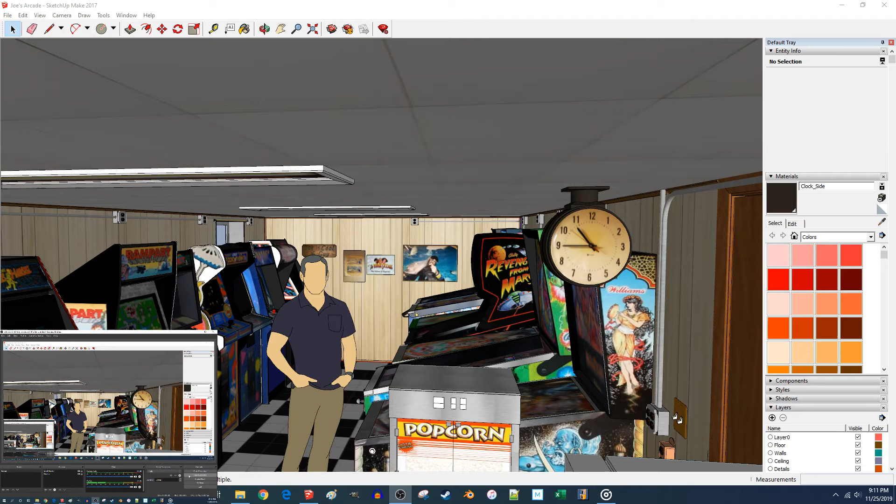This time around, as I sneak over to my Joe's Arcade files, we are going to be working on kind of the last bit of furniture that we're after, which is a water fountain that goes around here. Drinking fountain, water fountain, bubbler if you're one of the crazy folks.

Sorry, that was an unnecessary dig at Wisconsin while I'm stalling for time looking for what I'm after, which is just a picture of the water fountain. As a reference, there's kind of one. There's a good one, there's a little bit more of the area. So yeah, trying to do this water fountain.

Now I do have dimensions on that, I believe. It is 17 by 14 by 40 inches tall. And I'm going to say that 40 is probably to here. But I think I'm going to be able to get the base of this from the warehouse, the 3D warehouse.

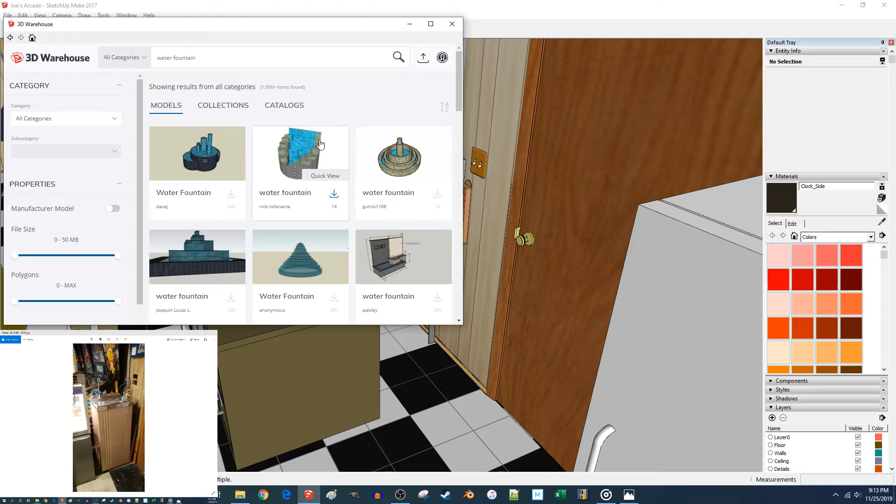Now I did kind of a cursory search. I didn't see anything that was like what I was after exactly, but I did, I believe, find some models that maybe I can mash together to kind of come up with what I'm after. So that's kind of like a classic public building type water fountain. So you're getting a lot of just like this sort of water fountain, which is not the sort of fountain that I'm after.

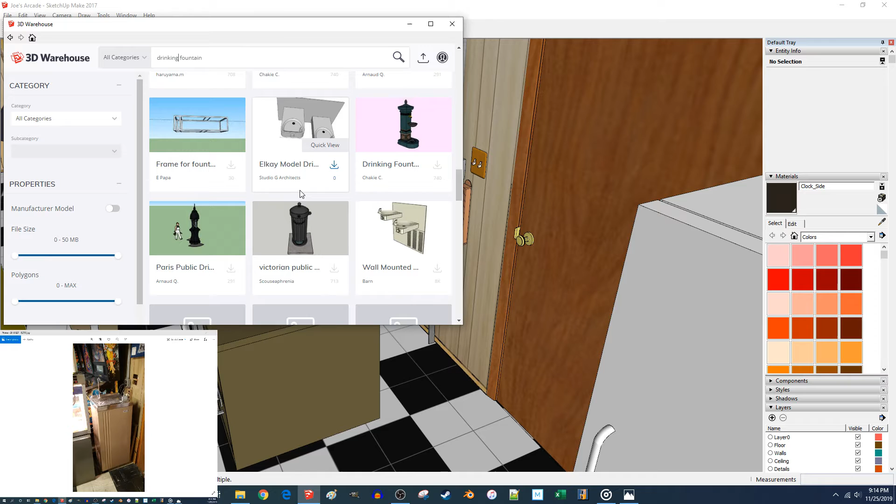I'm going to try drinking fountain. See what we come up with there. A lot of different models here. These are all closer to what I'm after. That's a pretty good model. I think this water bottle filler is something that I'm interested in, so I'm going to grab that.

Oh, I have to sign in. Alright, here we go, back on. I had to reset my password there because I couldn't remember it. Anyway, we were in the process of downloading this water bottle filler, which I want to check out the details real quick too. Yeah, okay, interesting. And of course, modeled by Courtney L. So we'll go ahead and download that and load it directly into the SketchUp model. There we go, looking all right.

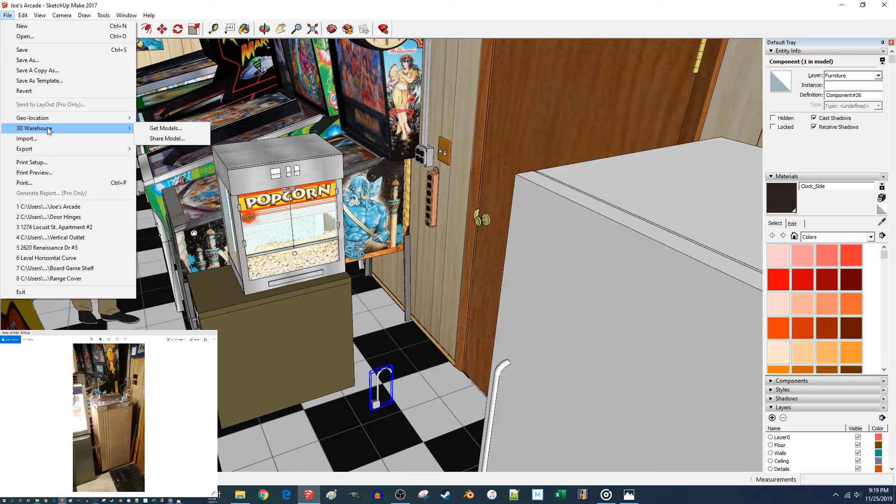And back to the warehouse. Gonna try to find a few more details of this item. Drinking fountain. These are almost not far off. That's almost pretty close as well. Not quite though.

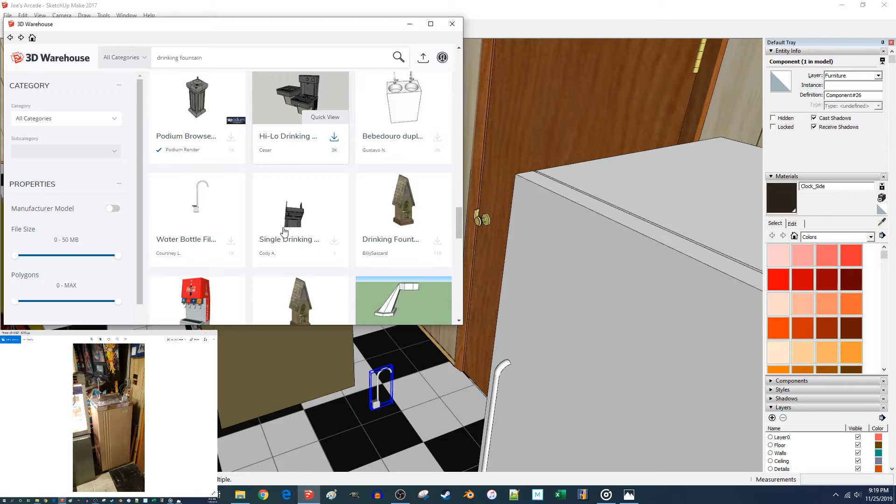Maybe the best that I can find, though we will see. So we keep scrolling down. That's not bad.

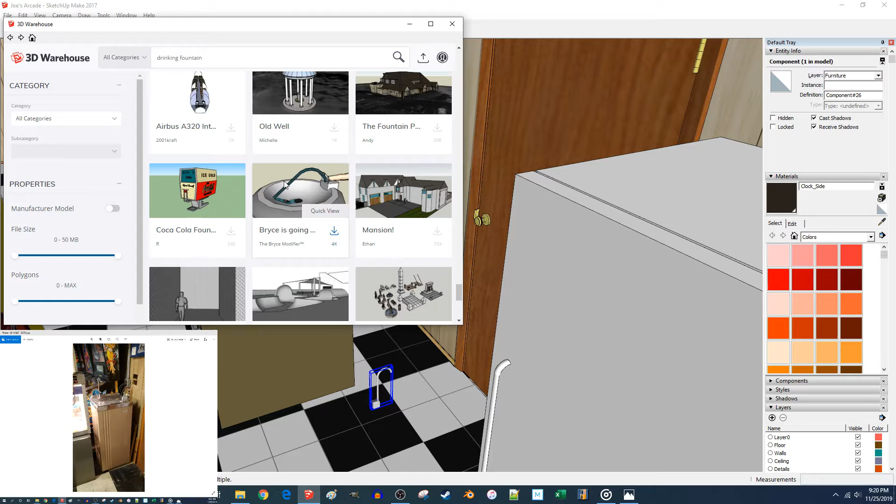Wendy's restaurant. That's pretty interesting, I guess. Wow, this has got a picture of a finger on it. Just curious what this says. Bryce is going to drown in the water fountain. That's horrible, poor Bryce, get out of that water fountain. Very strange. Huh.

All right, anyway, we're gonna move past this model here. Go back to our main drinking fountain model page. It's a strange tangent. I just hope Bryce gets out of that drinking fountain.

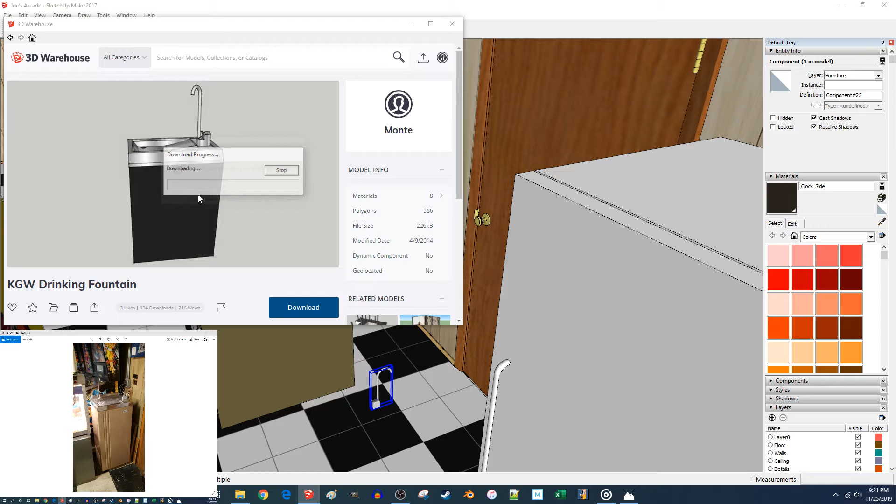And that's all we've got for those. So I think I'm gonna pick the best one available, which I would have to say was this one. It's not too far off, and we might use this as a base and make some modifications. Let's download that. And let's also make sure, yeah, I'm on the furniture layer.

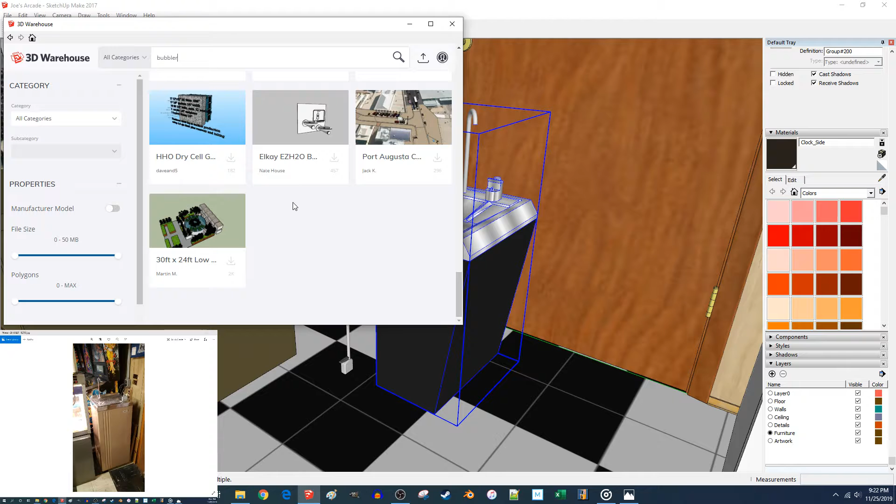Let's do one more quick search through the warehouse too, just to see what's out there. Wonder what will happen if I search bubbler. Get a lot of strange things here. Very few of them appear to be drinking fountains, so we won't use that. I'm going to take one more search through water fountain, but not very promising.

So what I'm looking for that I haven't seen on really any of these is this unusual method of activating it. It's not very standard anymore, but it's okay.

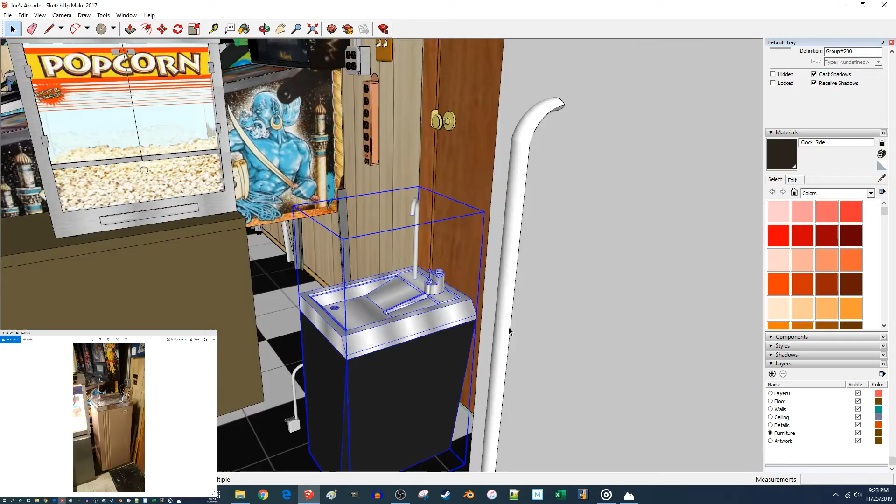We'll start with this one here, like I was kind of indicating. Make some adjustments to it and see where it goes. So I'll delete that.

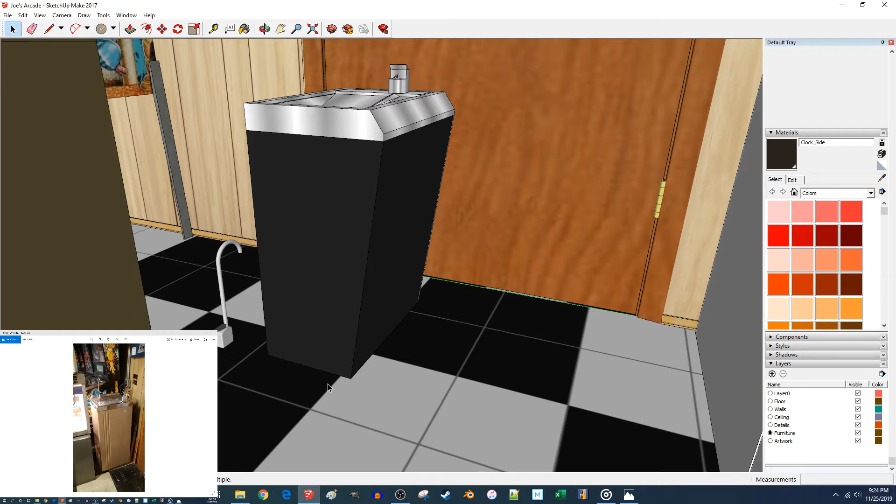And already I think it's going to be a good moment to start taking a look at the overall dimensions. I think we wanted this thing to be 14 by 17 by 40. So let's go 14.

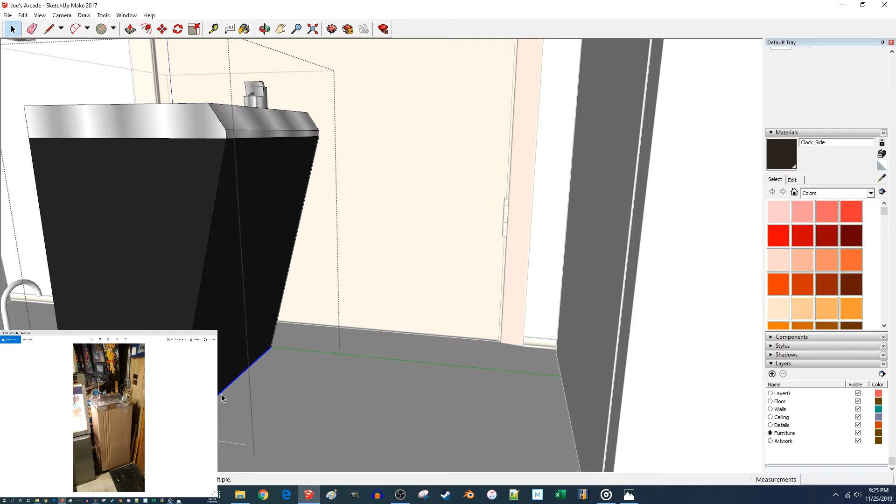And I'll grab kind of all this geometry here, and we'll pull this thing out, make it 14 inches wide. We'll grab that. Now we've got our width.

Should be 17 inches long. Pretty close to that already. But I'll grab all this stuff. We'll lengthen that to 17 inches.

Do a double check, measure twice, model once - 17 by 14, and 40 inches tall, which it is nowhere near. I'm going to just do that, because then I can grab this bottom face and just pull it to the floor.

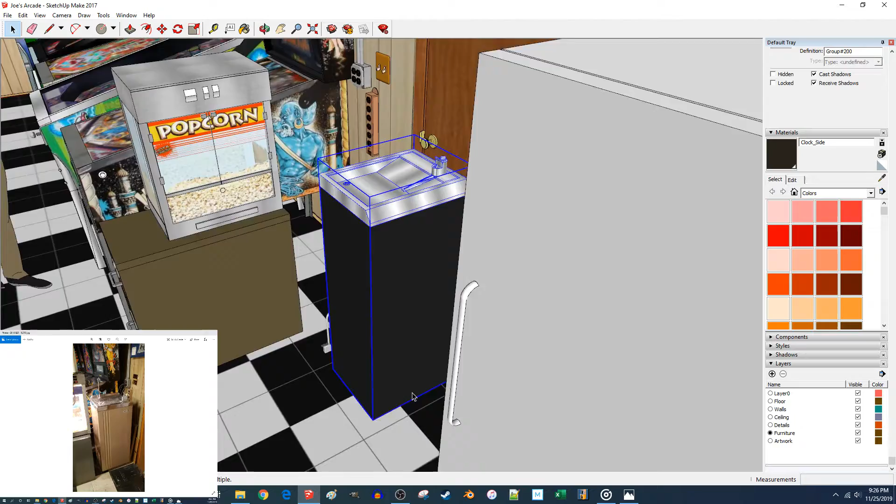Alright, I would say that's already looking a little bit more like it should. So another thing that I've noticed, and I don't know that I have a really great angle to show it, but this water fountain spigot should be rotated differently with respect to the lever.

So I'm going to turn this thing 90 degrees, and then the lever part down here should be rotated, yeah, 180 degrees.

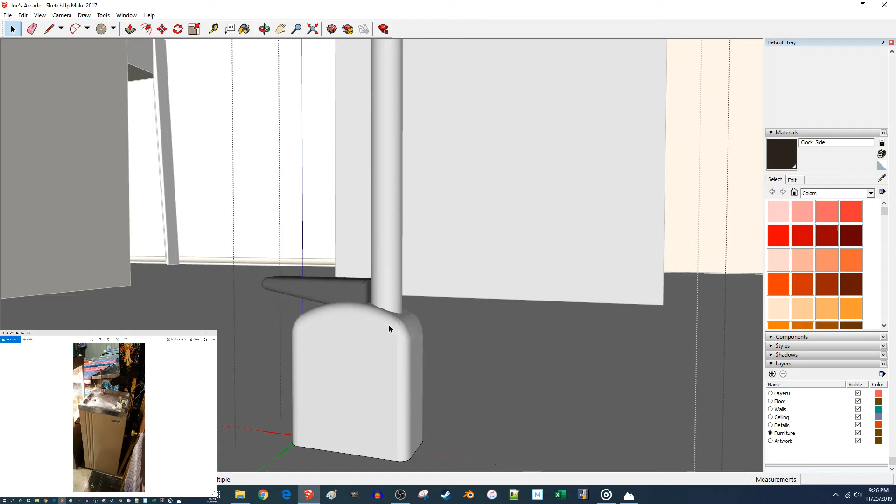Now, the other thing I'm noticing is that this is all one component. It's very well modeled, but it is going to be a little bit of a challenge to rotate this the way I want to.

I think what I'll do is I'll copy this part of it 10 inches away. What happens if I just try to yank that up? Yeah, it's not pretty, huh?

Okay, I want to see inside. Maybe there's a face I can grab a hold of. I'm going to get that off the floor so I can do that more easily, 2 inches up. Ah, yeah, here we go.

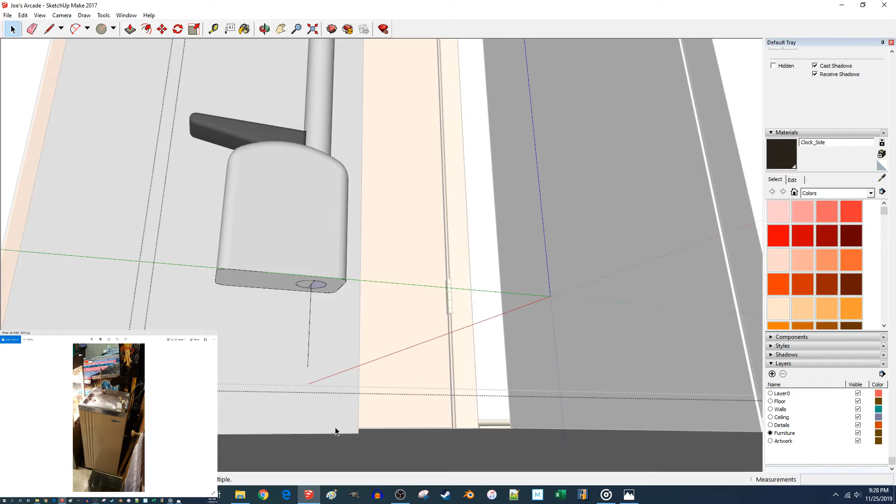I'm going to grab the midpoint of this and just draw a line down. That is where this thing should be centered. Now I'm going to select it. Oop, I'm losing a lot of stuff here, but I'm going to delete it.

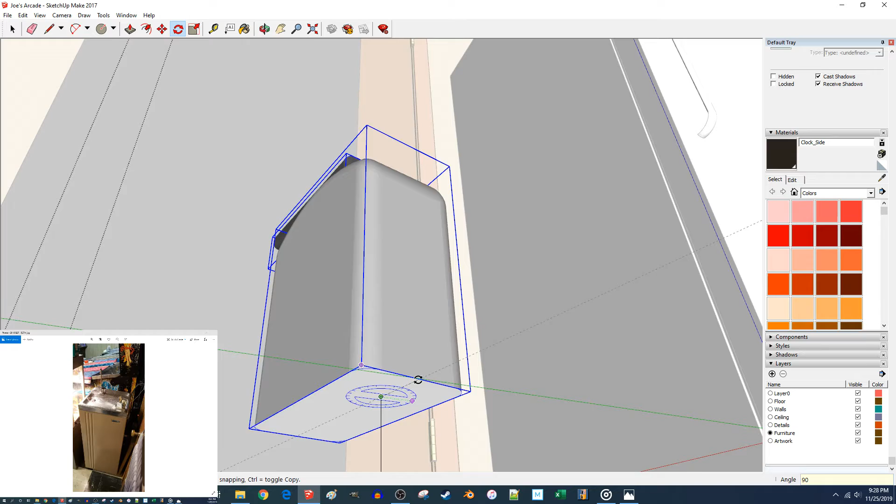And I'll group this piece, and I'll group that piece and this piece. And now I'll go ahead and rotate those 90 degrees. There's a little bit of some clashing stuff going on in the corners here. I'm not going to worry myself with that too much. It's a very minimal detail.

We'll move that back 10 inches. Now we're angled the right direction. And I would say this can get placed in here once that's ready. I'm going to make a few more modifications to it first, though.

Autosaves always remind you that you should save.

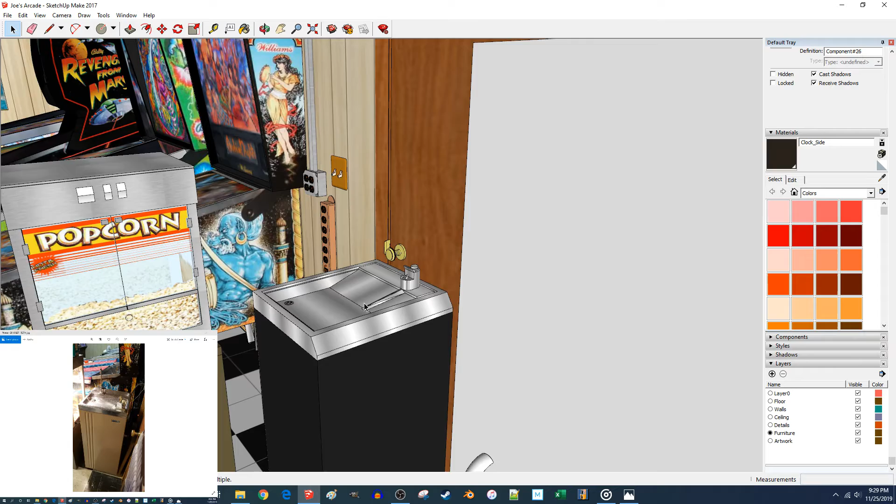So we have some of this same geometry in the model we're going for, but it's angled almost, which is interesting. And then above that angled portion, it's a little flatter.

Again, obviously I don't have real dimensions that I'm working off with on this, and I'm going to simplify it a little bit, keep these corners as opposed to doing radii. But I do want to get the general concept across.

There's also this edge here that's raised a little differently than it is in this model. So I'm going to start here, just draw some lines like that, and total eyeballing, I'm going to pull this up an inch.

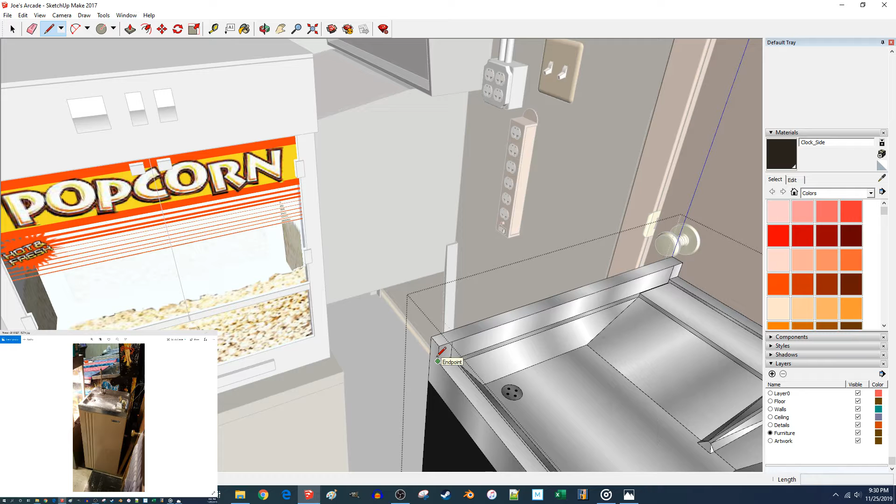And I'll make a connection there, delete that line, and make a connection here. That's going to enable me to grab these edges here, pull them back. Let's go an inch - an inch, make a 45-degree angle, which looks pretty good compared to the source material.

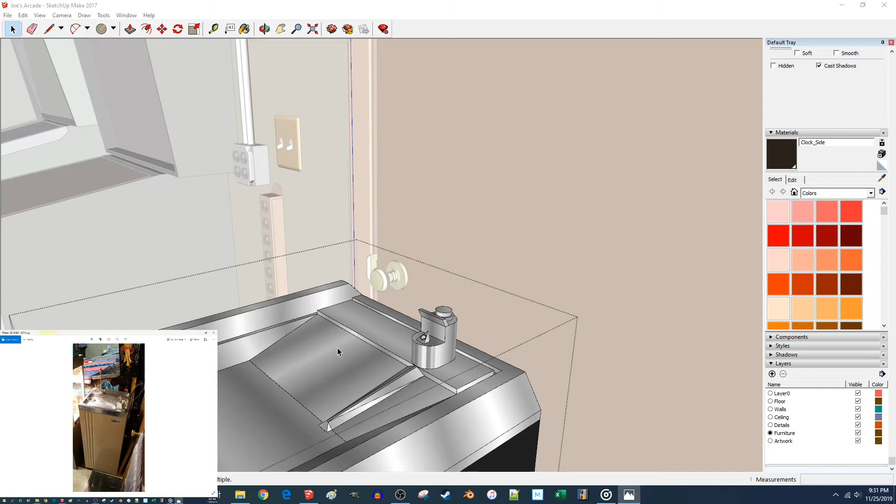Not bad at all. And I'm going to pull out the little shelf here, and that's going to be where the bottle filler sits. This elevation difference doesn't really seem to exist in the physical copy, so I'm going to kind of blow that away.

This isn't the most complicated model that I'm working with here, but it is really well cleanly done, which I always appreciate.

And almost, I'm going to see what happens. Nah, apparently I can't really move that face very much.

I guess more than anything, I'm kind of curious what happens if I lift these edges up and make this come to the same level, essentially getting rid of this vertical face there.

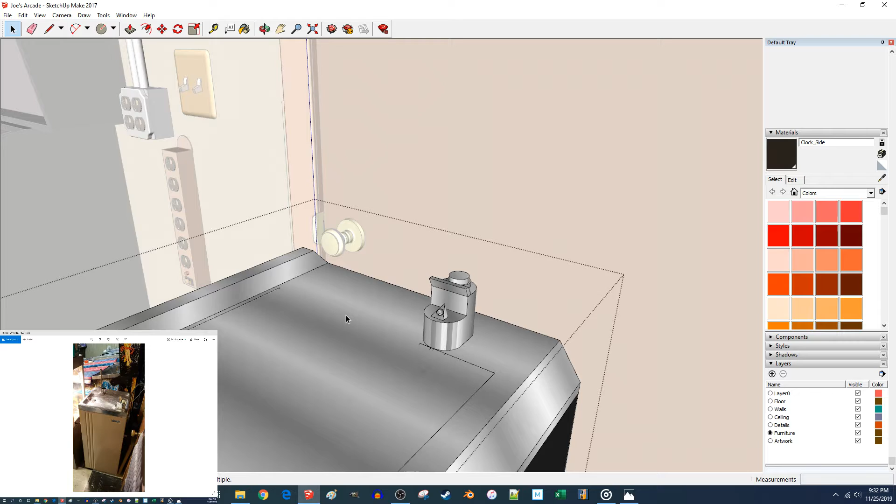It's not half bad. Don't have any extra lines, it doesn't look like, which is a risk, especially in other software like Blender - double lines are much more of a pain. Okay, I think that looks a little bit more like what I'm going for.

Now I'm going to grab this face here and the drain. Ooh, there's something more going on in the drain than I realized - the actual drain holes are modeled.

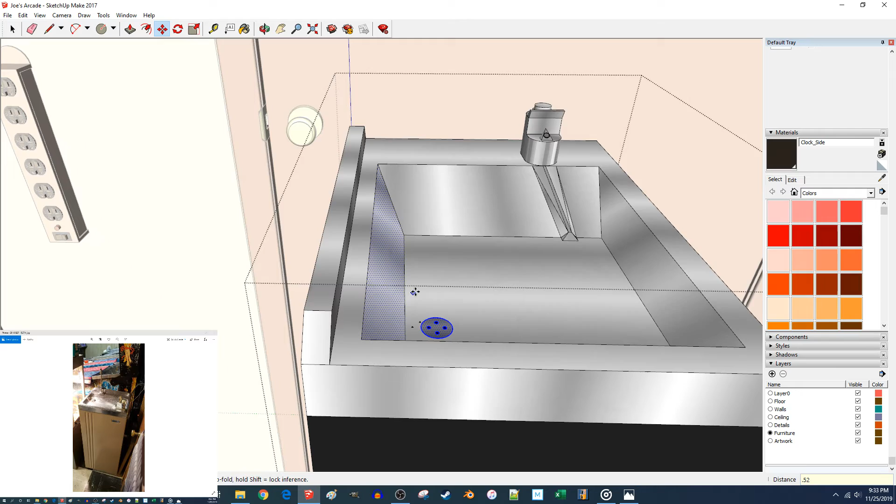Alright, we're going to now pull that out just a little bit, maybe 0.52 inches, and that's where this is going to sit. Looks like that wasn't quite enough to pull it out either.

Probably should have brought this over as a reference before, huh? But let's say I want it to be sitting about there.

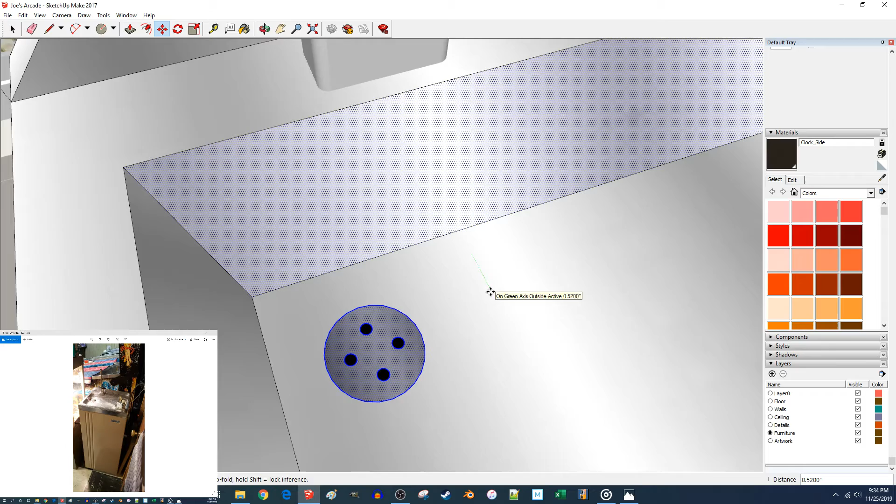I'm going to delete those, whatever they are - looks like some extraneous details. There we go, that looks all right.

That's about where that should be sitting. Even location-wise in this thing, it's not half bad, so I think I will keep it.

So the last couple things to deal with here are going to be some of this interior basin modeling.

I'm going to grab this and move it over, say, an inch, because it just looks a little closer. I'm going to move this over - well, before I do that, this should be a vertical face.

So I'll do that. Delete that, and now I'm going to move this over till I get close to the edge that I want, which I'll do - let's actually get like a semi-uniform edge going around this thing of 1/2 an inch.

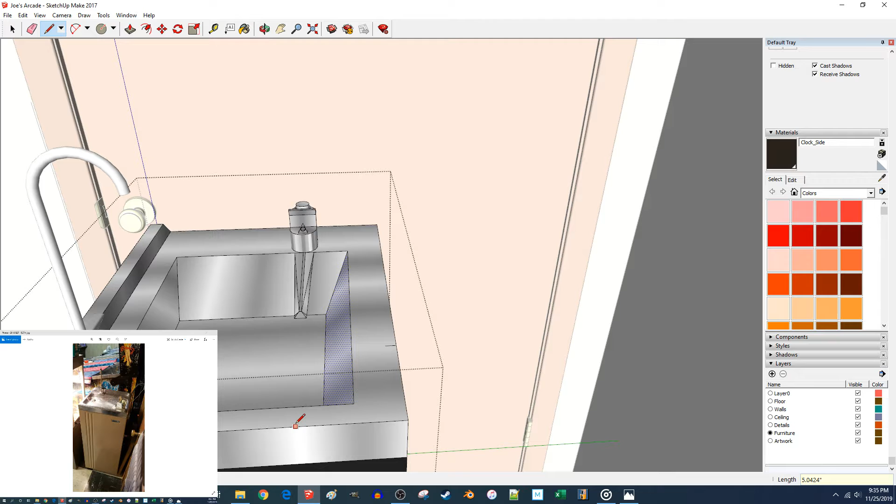Except for on that back side, which is about 3/4 of an inch. I'm okay with that - hopefully everybody else is as well.

But we'll move that, we will move this, and we'll hold off on that other side for just a second while I think of how to approach it.

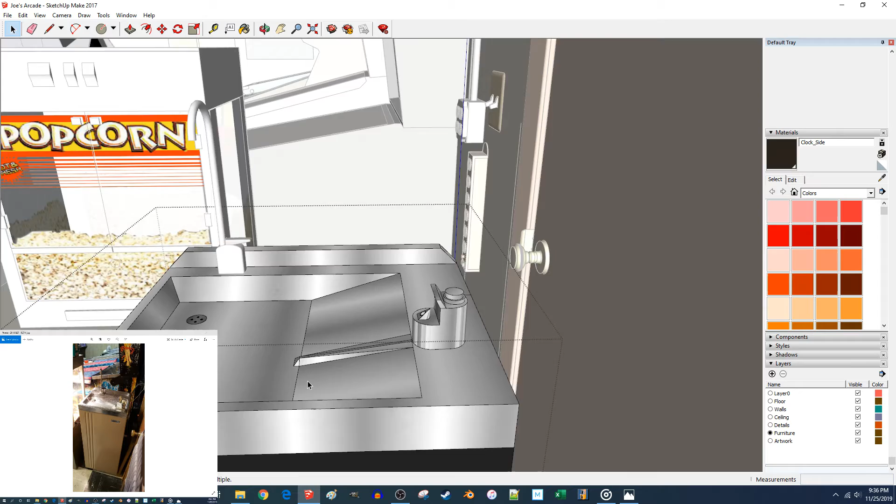Because this piece here, thank goodness, is its own component, so I don't actually have to worry too much. I'm going to just, for the moment, pull that thing back 5 inches.

And we'll take these elements here and move them back to our border. Now, some of this now is going to have to change.

This piece, I actually want to kind of extend out from here. And I might actually end up doing a lot of this from scratch now.

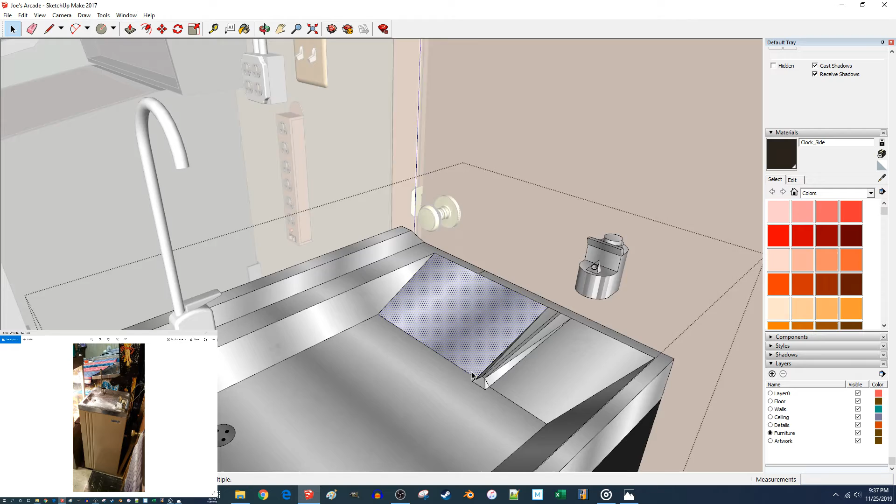Just want to think before I step too boldly and delete a whole bunch of stuff that I'm going to want to keep.

Keep these grooves going after they end. What to do?

I'm going to flip my attention back to this thing.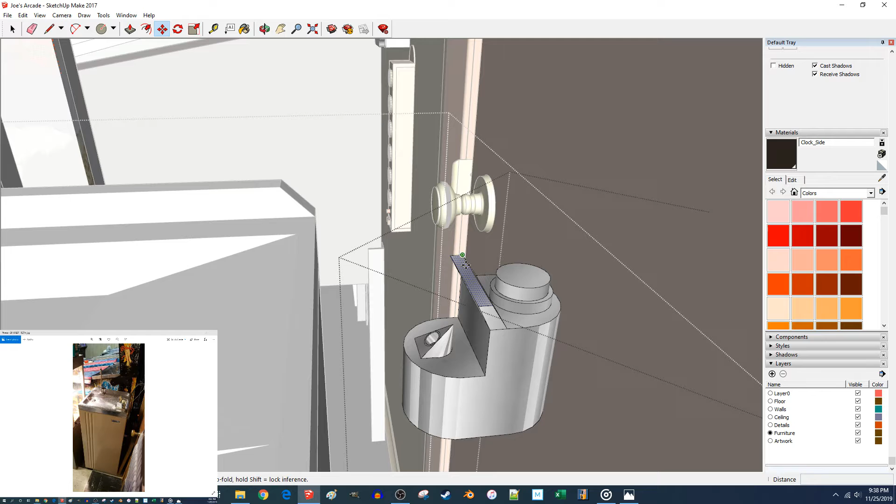This shield here should be a little bit taller, so we'll start by doing that. I'm going to grab it here because then I should be able to do an edge extend.

But it might taper in both directions. Oh, I had it there - I had it.

Perpendicular to edge outside active - that's not what I'm about. Alright, we'll...

Pull it up like that so I can have something to work with here.

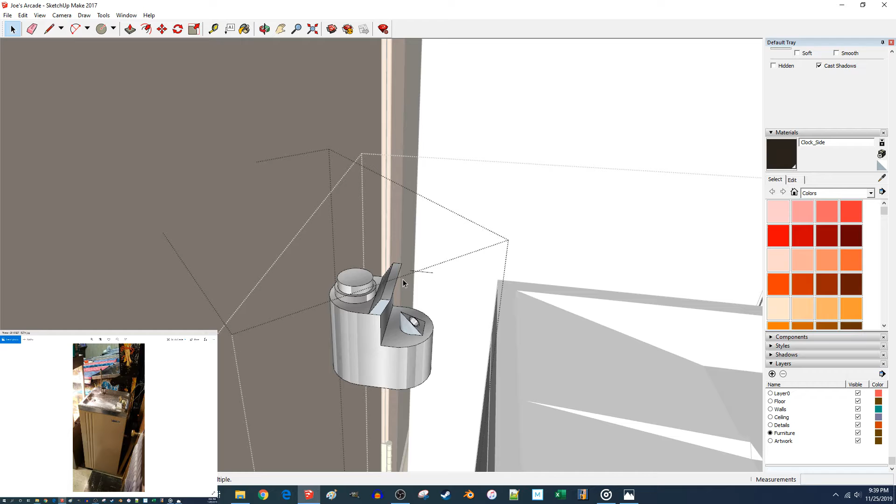Oh, you're killing me, model. I'd like to bring it up to about there - like that, perfect, there we go.

Okay, and now, instead of this button, which I will delete, we're going to have a slightly different shape.

Still going to be a circle, I guess. We'll go, sure, 24 sides will be fine, and we'll go 0.5 inch there on radius.

Okay, and last-ish but not least, we'll grab our little handle, bring that out.

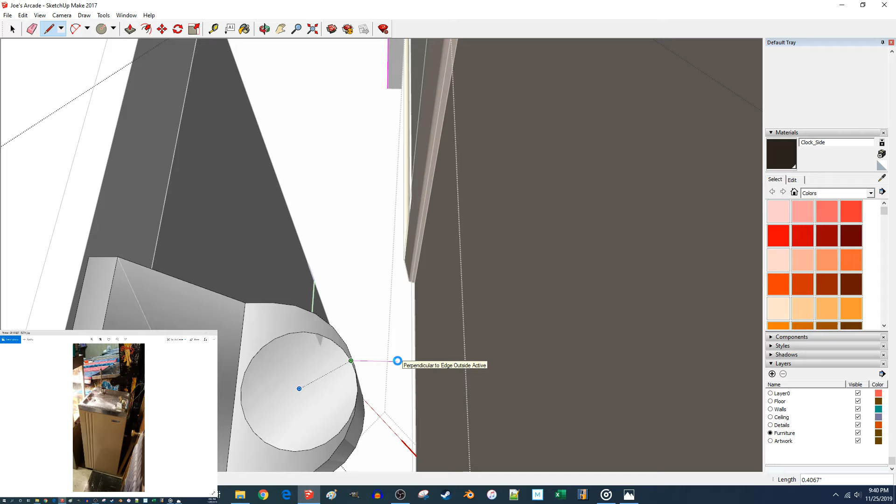I'm thinking 0.4, but I want to actually see it here. Point 0.4. Okay, that gives us sort of the shape we're after.

And we'll pull it up by 0.5.

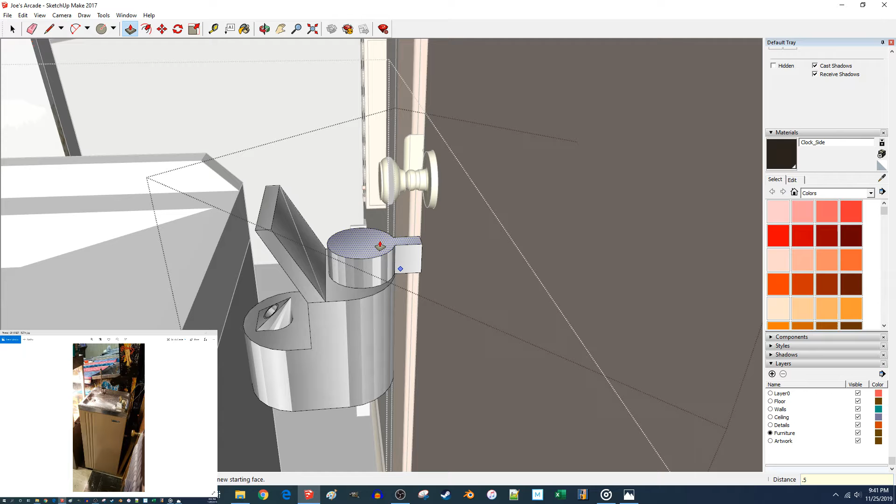We'll group that thing, but first I'm going to color it closer to what it should be. Ooh, got a lot going on here. Let's see what to do next.

Trying to decide if this is going to come off noticeably better with a little bit more detail. I think this should be depressed like that, definitely. I'm also thinking, whoa.

Oh, come on, come on. Give me a circle snap. I guess not.

Haha, we've got some crazy coordinate axis stuff going on here. Let's see if any of these will work out. There we go.

0.5, let's do a circle and make that thing. Well, let's do a circle at 0.4 for radius. Another one at 0.2. And a last one at 0.05.

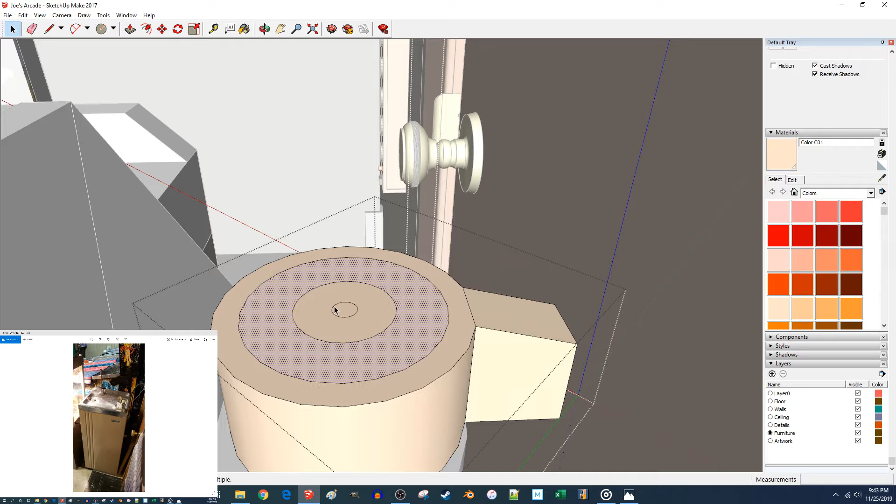Now, what am I doing here in this kind of haphazard way? I'm going to try to make a dome, is what I'm going to try to do, by bringing this up. Oh, but I've made a critical error, because this face isn't split as many times as it should be.

But this will help. So we'll go up 0.07. That looks about right. And I'm just going to hide these lines here.

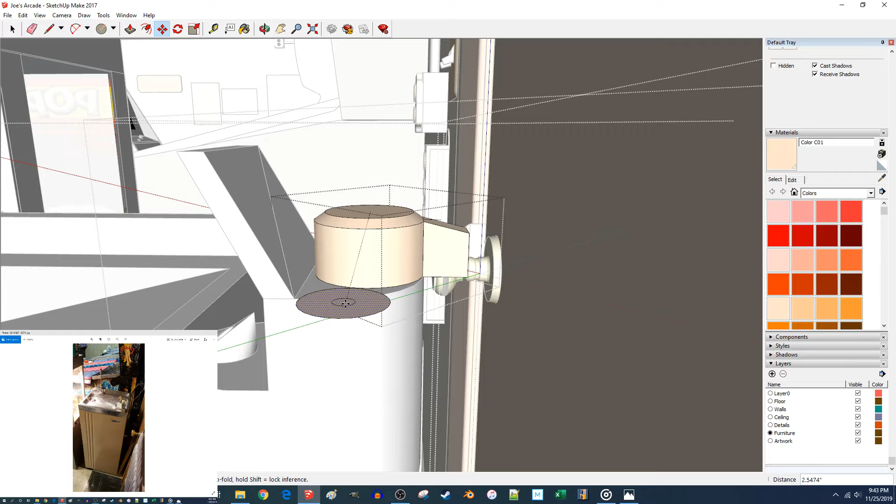And we'll go up 0.05. And we'll go up 0.025. And we'll hide these lines.

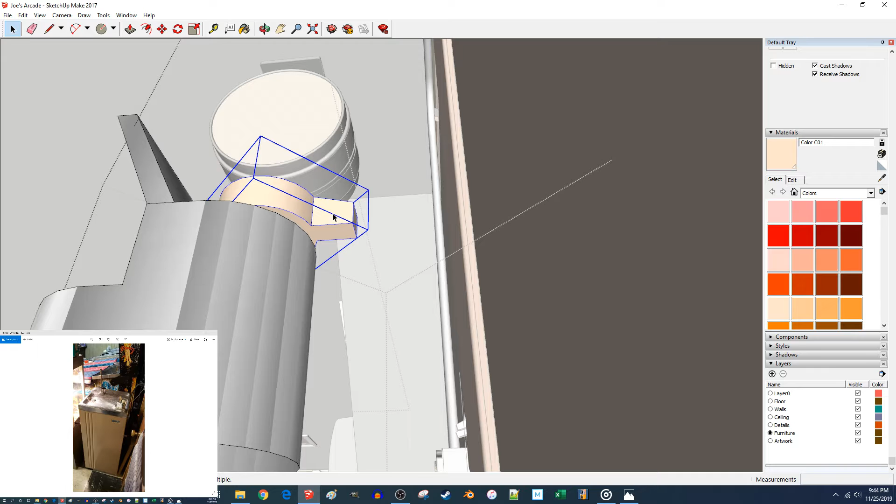And now I'm pretty happy with it, but the whole thing looks a little too tall, so I'm going to bring it up by 0.1. Yeah, 0.15. And now I'll move that thing down by 0.15 so it sits flat again. And there we've got our little button.

That shouldn't be there. And now all the edges kind of look a little out of place on this one. So we will hide those.

I missed one. Okay, let me see, I probably missed the one on the opposite side here too. Ooh, no, I didn't. Excellent. Okay.

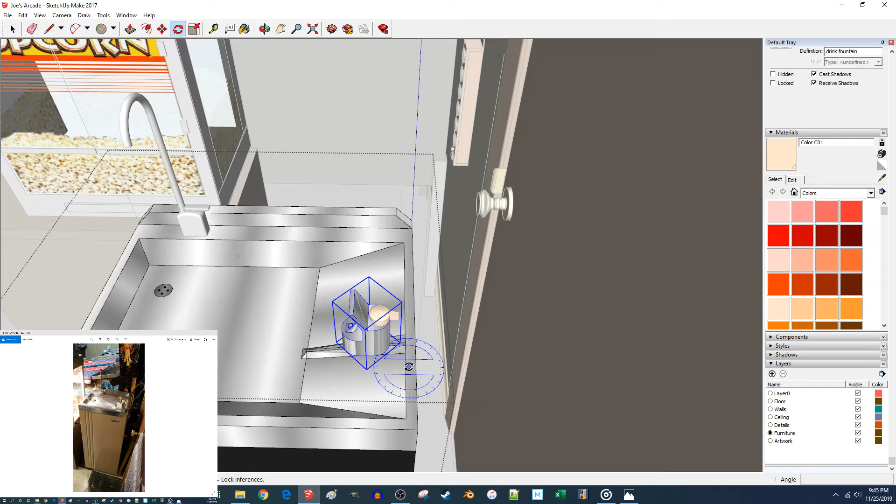So with that modeled, I'm going to bring it more into where I would like it eventually. And it's going to get rotated 30 degrees. And we're just kind of placing it somewhere that looks about right. Like here. Okay.

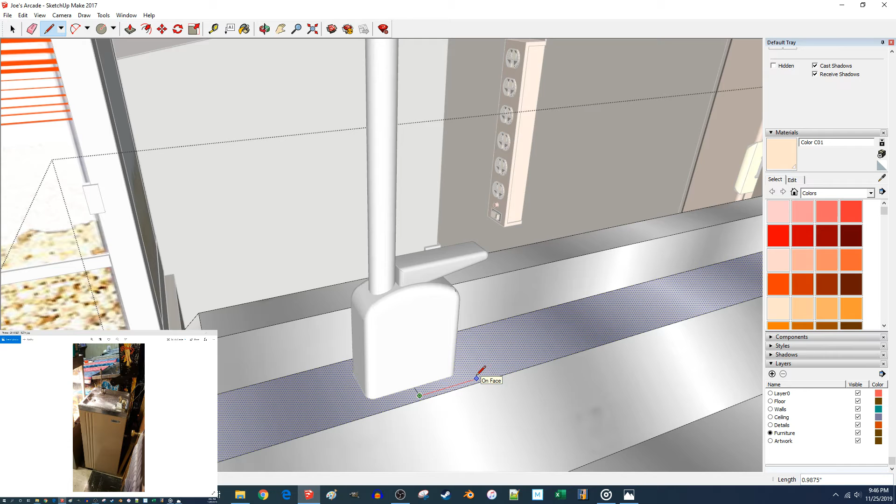Now, kind of turning my attention back to this area for a brief moment. Something I've noticed is that this would look a little more realistic if I create a raised platform here.

Oops. So that's just what I'm going to do. I'm going to grab that. Oop, and how do I want to do this? Let's pull it up just 0.1.

I'm going to move it to there. What was that distance that I did? 0.08, of course, you know. Let's move this thing in 0.02.

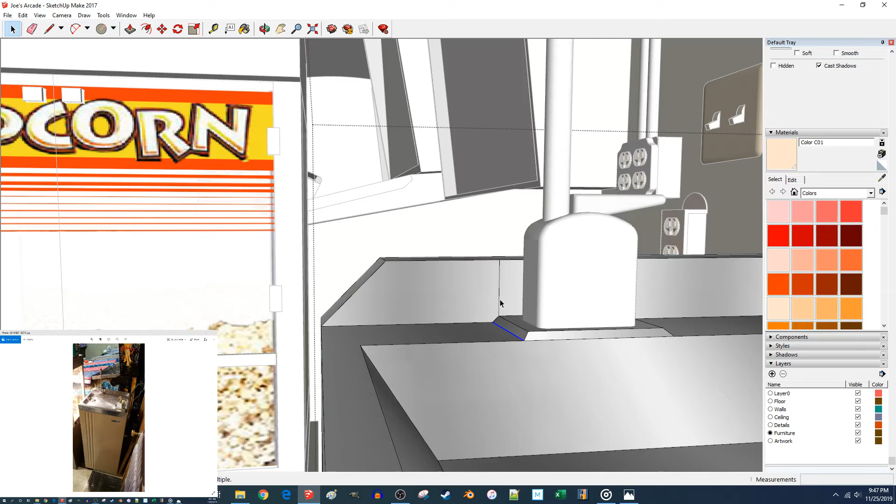We're doing a little bit of rounding here, but that way I can bring this out 0.1, and I can bring this out 0.1. I can delete these lines now, and I've kept a single face in the back, but that's on a little bit of a raised section, so now that's, of course, replicated.

And I do want to go ahead and do the same thing over here eventually, but this part is still a little bit of a puzzler for me, how exactly I want to handle this. And I think it's just going to come down to some manual sketching work.

So I want to better define my template here. I want this taper to be 1 inch on every side. Like so.

And I don't know about to you, but to me this whole bottom looks a little bit too low. So I'm going to raise it by just 1/4 inch.

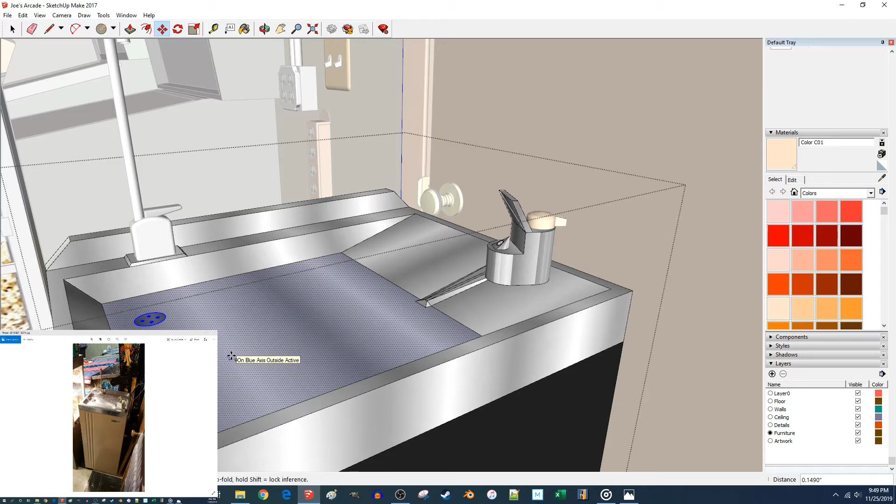And I've really messed up my geometry here. But I think I'm less and less likely to be preserving that at this point. In fact, I think the time has come. I'm just going to delete it. Sorry, shape, you've been demoted to not being a shape anymore.

Yeah, it's for the best, I think. I'm going to bring that back to be in line, and then I'm going to bring it out an inch.

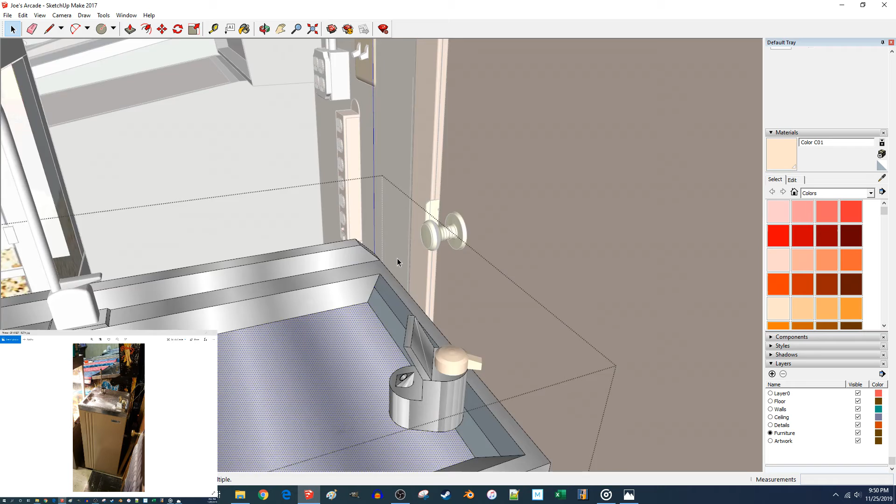And I'd like to bring this up an extra. No, I think it's got to stay. I think that's got to be about right. If not a little shallow, but that's what I'm doing.

Okay, so I'm going to end up moving this a little more back towards the corner. Yeah, something like that looks, you know, about rightish.

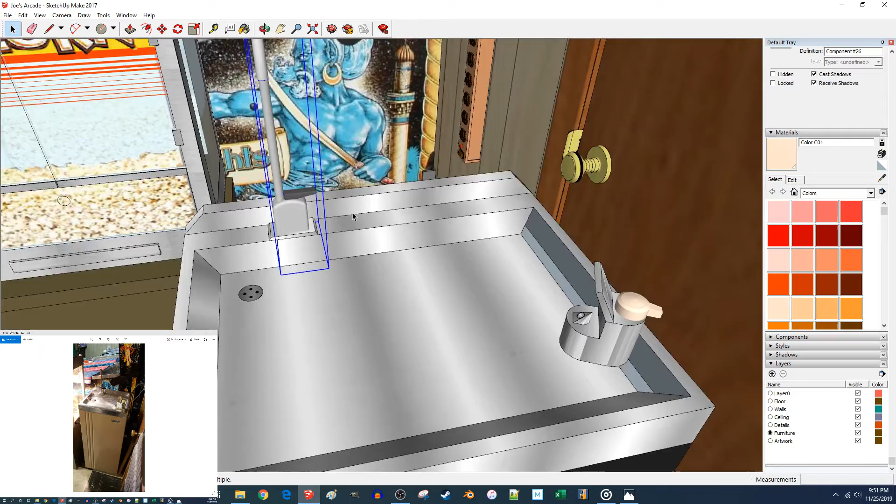Another detail that I'm seeing that I'm not a huge fan of, positioning-wise, is I think this should be a little more to the right. So we're going to make that happen. I'm going to just move it an inch to the right, and I can now pop out of here, move that an inch to the right. Yeah, looks good.

And I'll come back into this portion of the model, and we'll just draw something in. Move that thing out 2 inches. And...

This should be somewhere like here. I want this, which is not a straight line. What happened there? Let's come out 2 inches.

Glad I came to this crazy camera angle, because that was wild. And I'll do something like that.

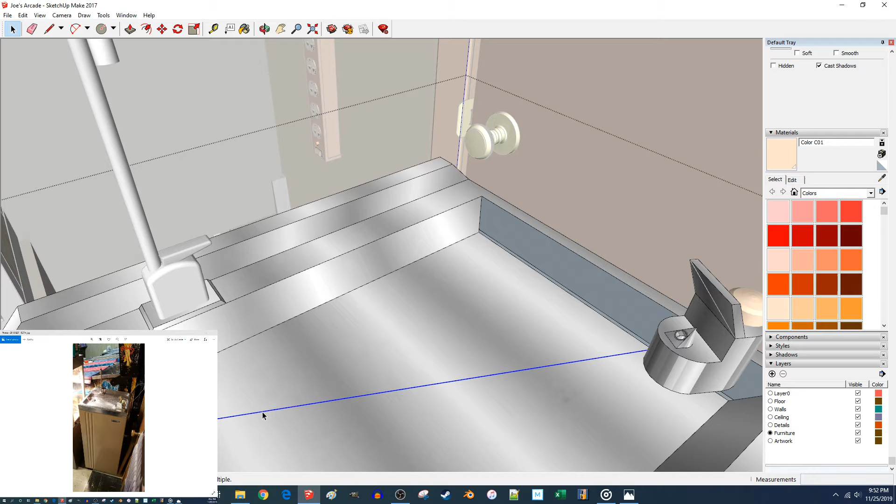That is going to become this kind of inner island that's going on. I'm just making this up as I go along here. We're coming up 0.375. We'll move that instead of an inch, half an inch.

And I've probably created a problem here. Nothing that can't be solved. But this isn't going to be a uniform taper anymore. I don't think it has to be per se. Let's move that, let's copy that over. And nope, half an inch would be better.

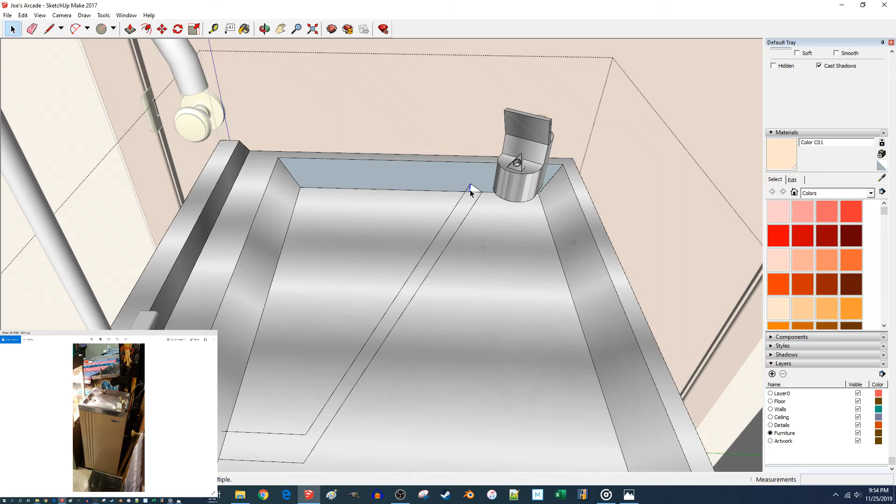It's not what I'm about either. What I am about would be just copying this to get my same angle. Oops. That's not going to quite work either. I'd like to get just a single face going, if that's not probably super obvious what I'm trying to do here, without doing some really complicated offsetting too would be the other nice thing to pull off.

I think what I'm looking for is I want to draw a perpendicular line here. Work with me, SketchUp, work with me. Perpendicular, please.

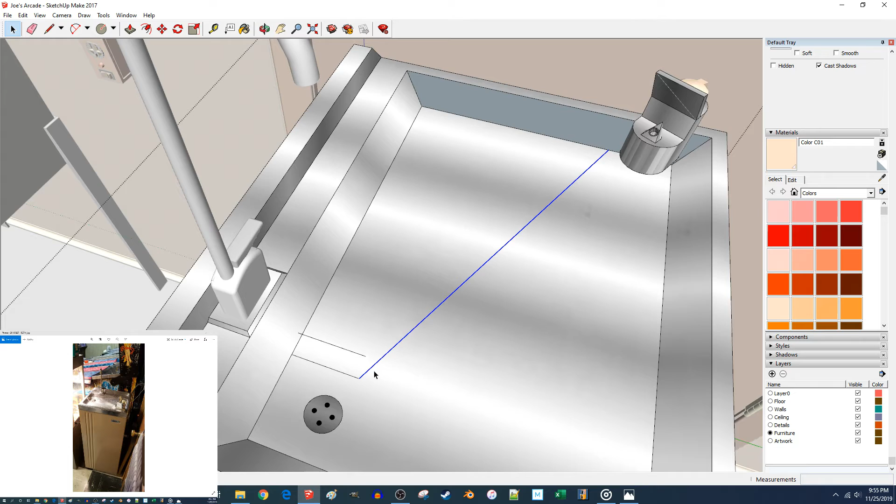Nope, okay, we're going to do an offset then. I'm going to move that down to ground level. This is what we're after. We want to get this half inch distance over here. So I want to go perpendicular, but half an inch.

Whew, this is more complicated than it seemed like it would be. And now we're coming up 0.375 inches. Grabbing that, moving this, whoop, moving this up 0.375.

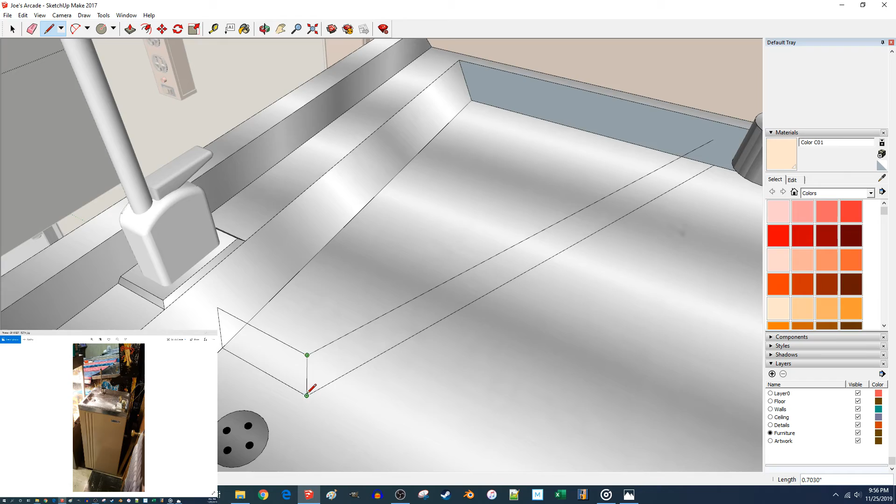We've got an intersection, which means things are going the way they should. Delete that, extend this line like super far. We'll see if it was far enough. Come up here to be on face. And we've got a face there now.

That face should be gone. Get this out of the way again. That should be here, but that face should be gone. And the reason I want that is just to be able to catch this intersection point. Then that can go away again, because now this should come down and be a face. And that should go up and create a face there.

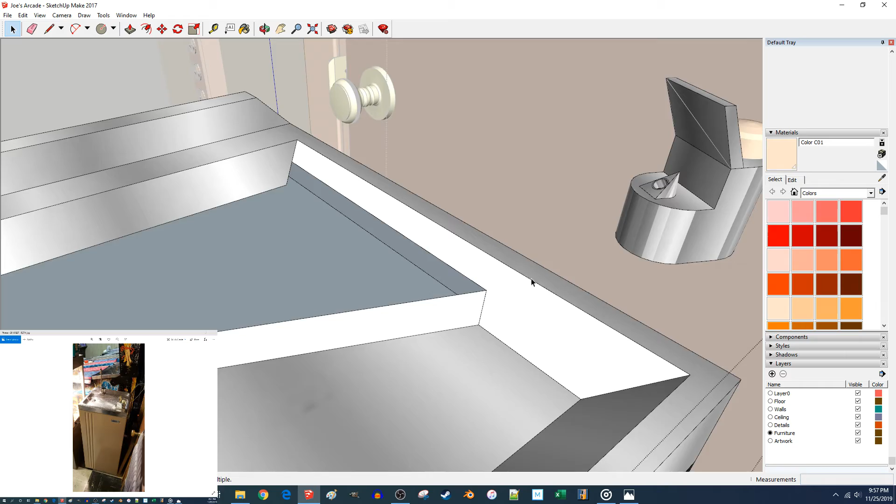But not quite done with that yet, because we are going to create a little raised portion for the fountain. Dreading that a little bit, because I can tell you one thing, it's going to be a little tricky. Can delete this and that, create some new faces there. I'm going to grab my material picker too. I'm losing the texture on some of these faces.

And I would like it. Okay, back to looking sharp. The real question is going to be how to create this. So I'll move that thing back in 5 inches like it should be. And I think I've got an idea.

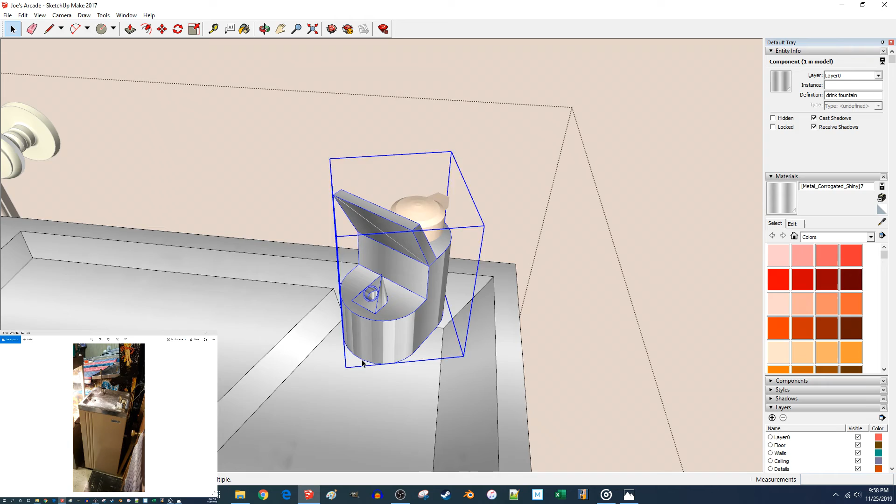Let's create an arc, and we will offset this arc a quarter inch. And now we'll delete it so there's no trace. And we'll offset another arc to there.

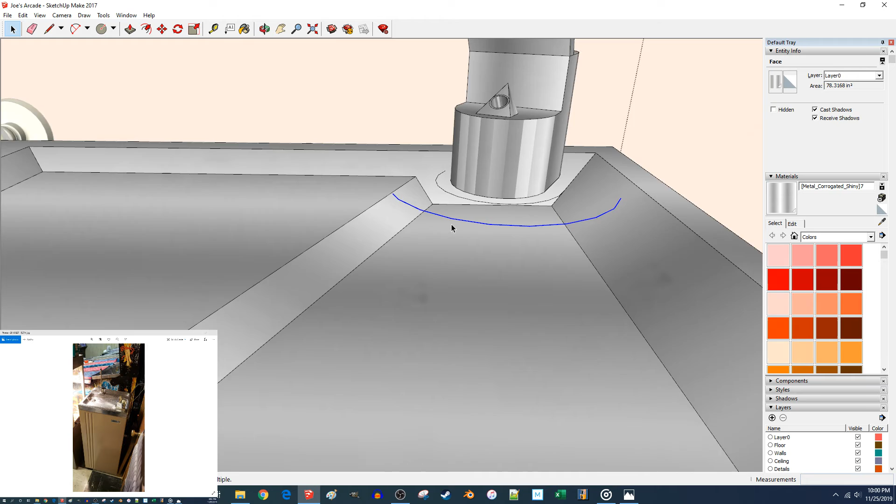I'm going to bring this up by 0.75. I feel like I'm doing rocket science. And delete that, which I hope I don't regret. We'll bring this up by 0.75. Might be because of these space beats that I feel like I'm doing rocket science. Put that down by 0.75. Okay, so that's the footprint that I'm going for on this thing.

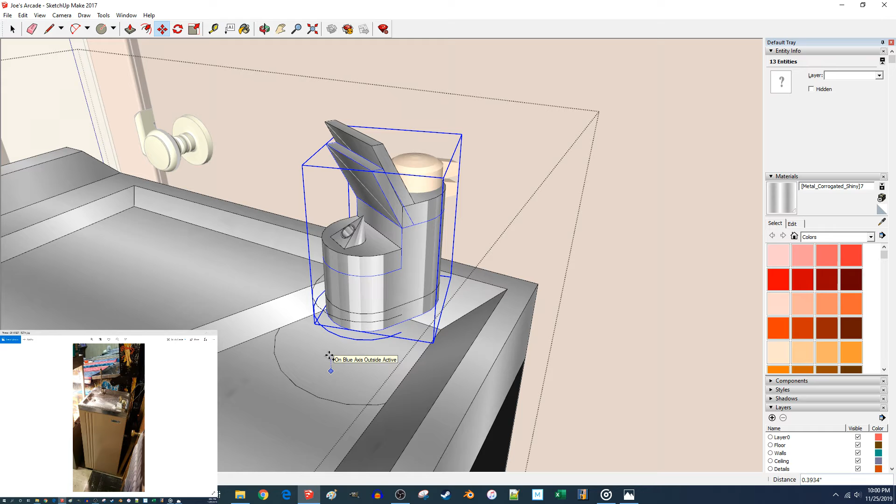Now I just gotta bring it home and connect some dots. But before I do, this part should be raised a little bit. Let's raise it by 0.15. Oops, that was a copy, not a raise. 0.15, okay.

We're going to scale this thing by our good old friend -1. And create another one out here. Yeah, this is getting technical. But now we've got like a little offset ring on either end. Face up, yay! Oops.

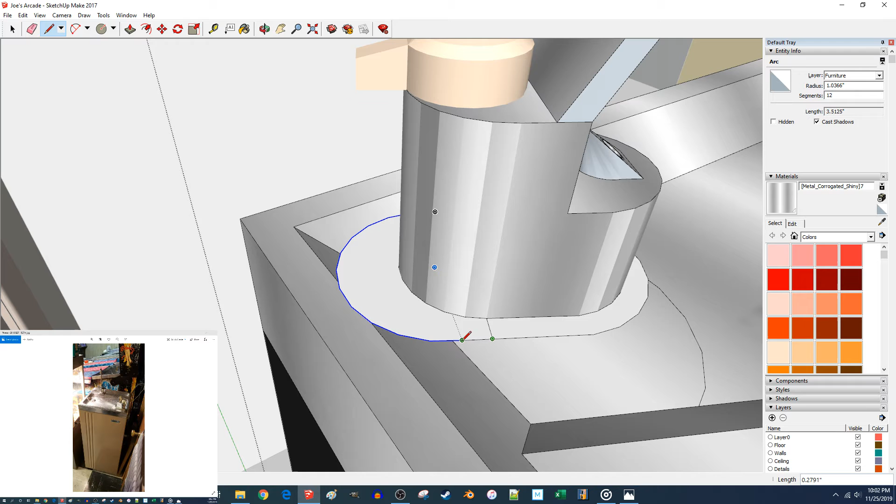Yes, yes, I want to go to here. So I have like kind of a uniform offset. I'm feeling like I'm really flying by the seat of my pants here more than usual. Maybe it's just because I'm thinking about it as opposed to just doing it.

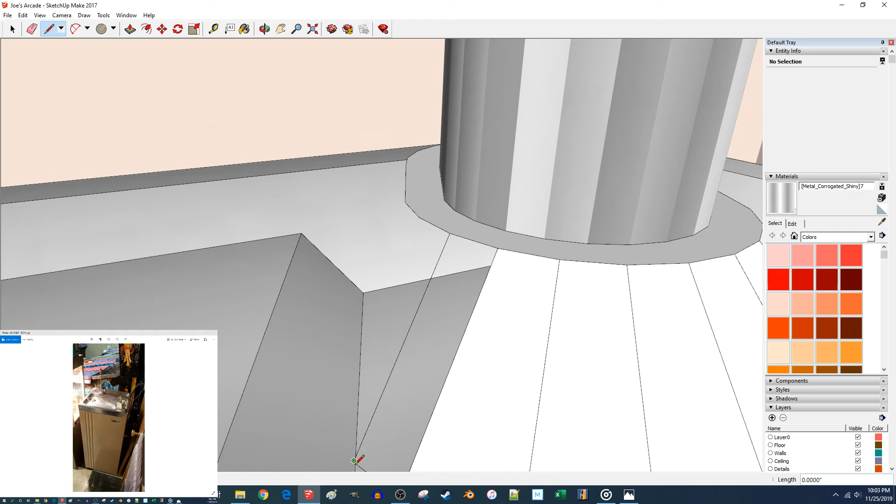But we'll connect all these things. Make some mad scientist faces. There's a really nice face snap that I had just before. I wonder if I can get that again. Yeah, that's cool, that's a good inference. I don't think I'm going to get the same over here, and I'm not really expecting it, I guess.

I could have done this with an intersect as well, but for the precision that I've got right now, I think this is adequate. Just want something that's going to look kind of right. That is not it. But that's getting there.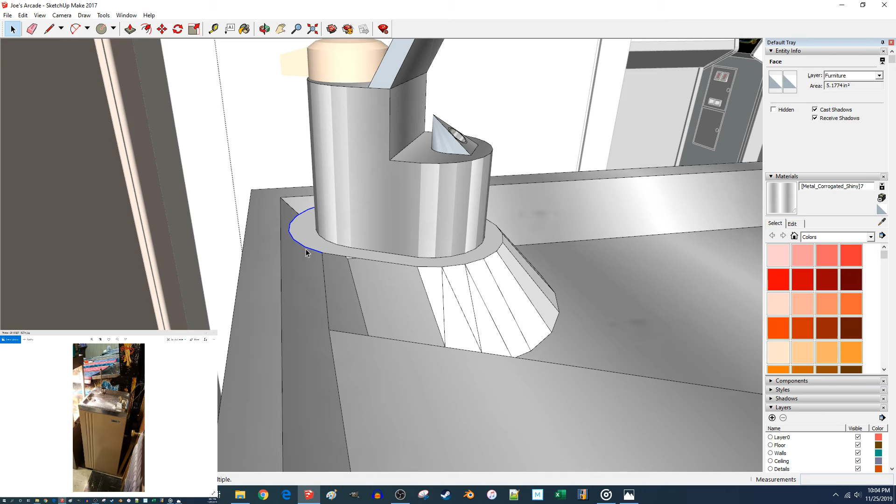Want to grab this and move it down. Want to move this down by 0.15. And I want to do an offset of 0.25.

Start connecting some of these faces up. That's going to go away and end up being just kind of flat.

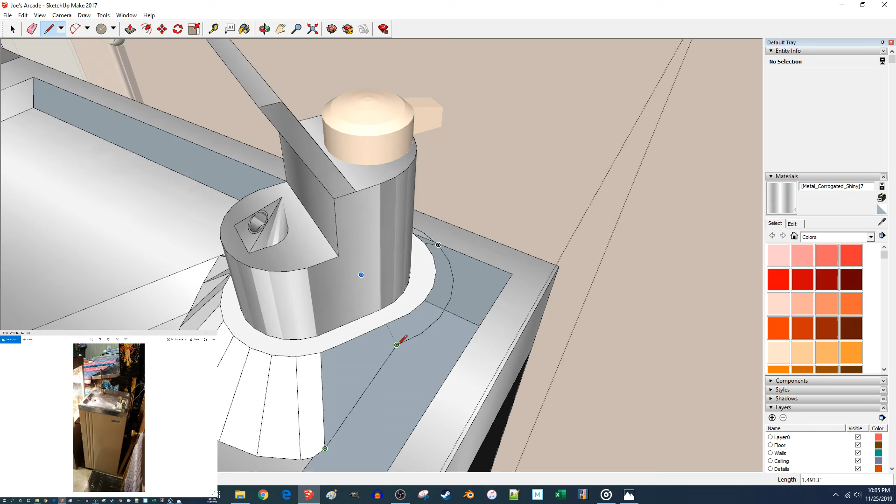Wonder what happens actually if I connect like that. Ooh, that's getting wild. If I do that, we're just like making up geometry now. Good times. And hey, if it works, I'll go with it. Yeah, it doesn't look half bad.

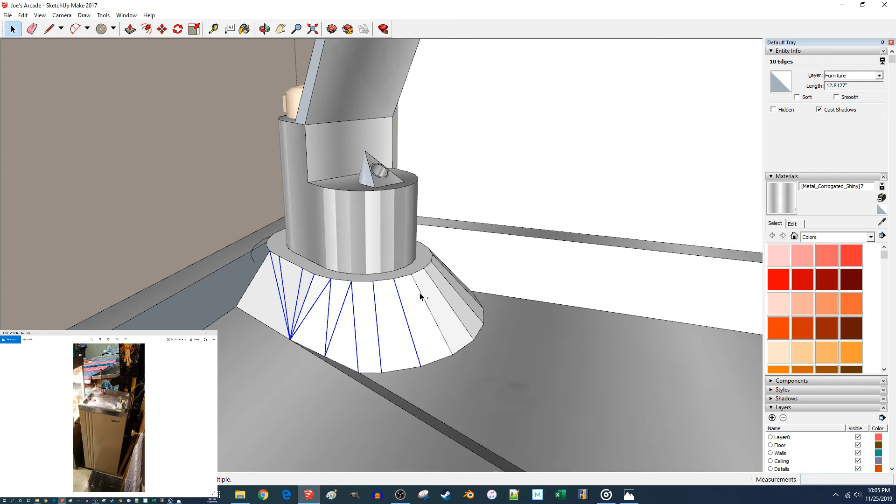Those are all working edges. We'll hide them. Make things look, yeah, a little bit cleaner.

We've got some faces to connect down here. Get rid of that. Want this, want that. And we'll do that.

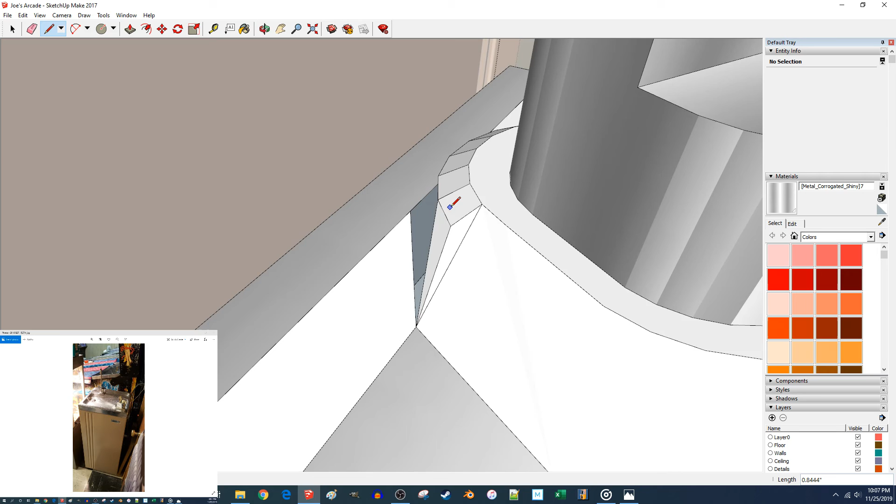Okay, and that looks like I can just connect it to anywhere and it will face up, which is good. For the love of all that is good in this model, I'll admit, I just got no idea what's going on in this little corner.

And I don't think that anybody who might be watching this does either. That might not be true. If you know what's going on in this corner, definitely yell at me for how I could have done it a little cleaner.

But I'm going to take this decent geometry and run, because I think it's enough to get the job done from looking at it across the room. Gonna look fine.

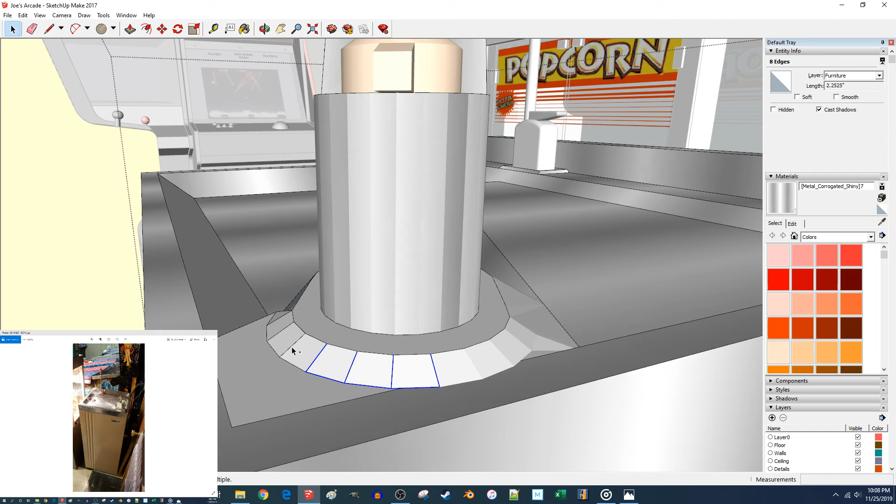Let's hide those. Oh, I still got one more spot to button up here. Thought I was in the clear. Got an edge there and there. So we'll connect that.

That looks good. That maybe is the best looking part about this whole thing. And there we go.

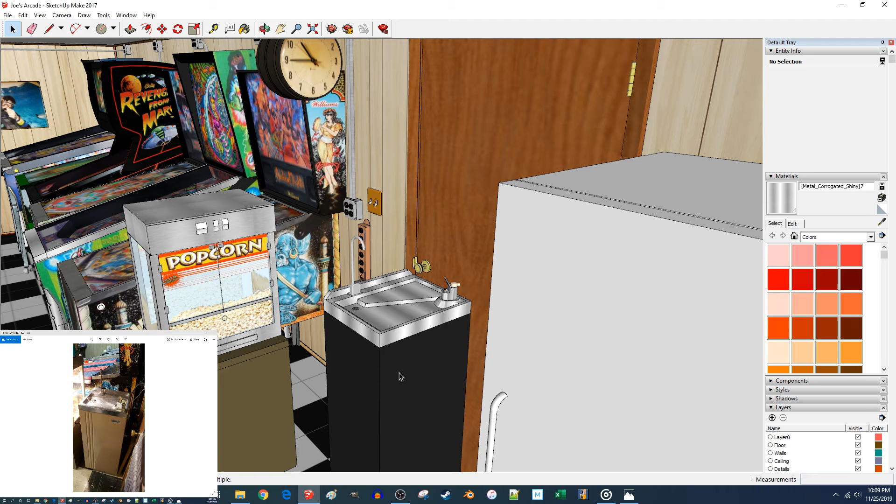Let's do some paint bucketing. Get that all done up. And that looks pretty good. Couple little details I think will take this the rest of the way home.

Want to grab this. That's not the right color. This is close to the right color, but it's a little bit too light.

I think we'll try this. That's not bad. Yeah, happy with that.

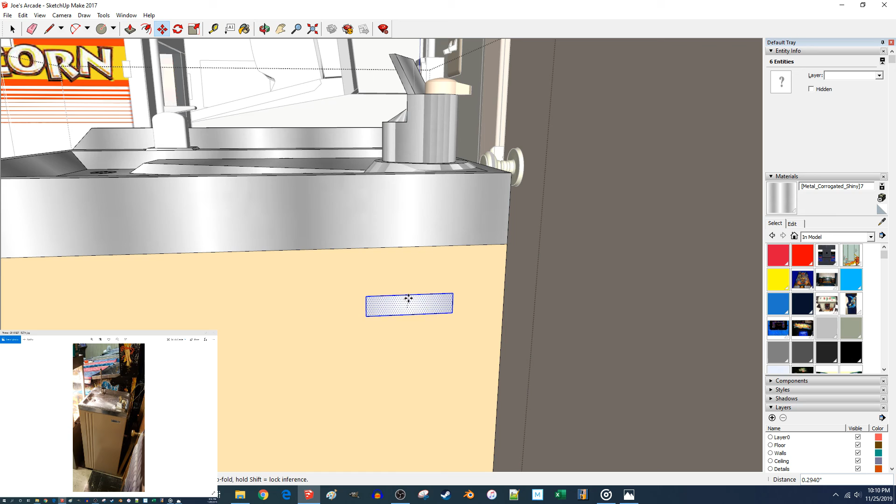And grab this texture and just do a little bit of metal there to represent the logo. That looks pretty good.

And we've got one more little detail that I'd like to get. That would be if I take a circle like this, let's go circle, a few less sides, it's going to be a small detail. Go 1/4 inch.

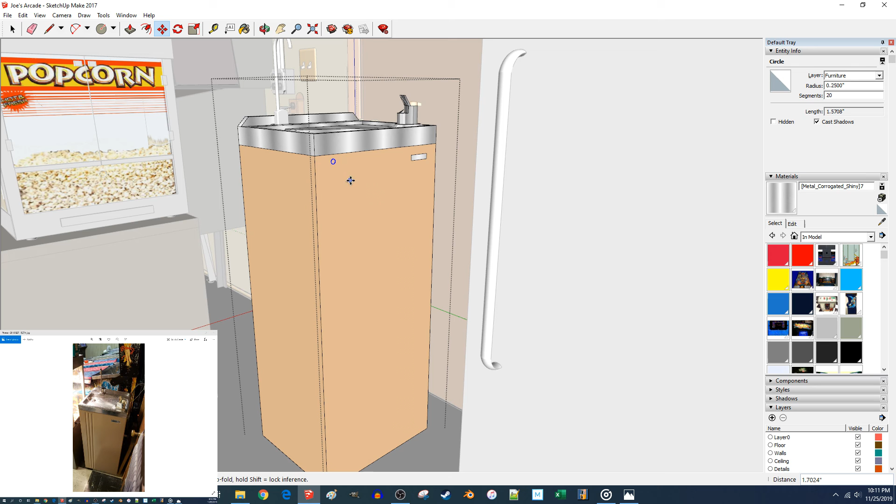Come up something like that. Size-wise, I think this will be okay. Create that. And I will

take this down 36 inches. Go endpoint to endpoint here.

Won't let me select it like I want to. We'll take that and we will offset it inwards by 0.15.

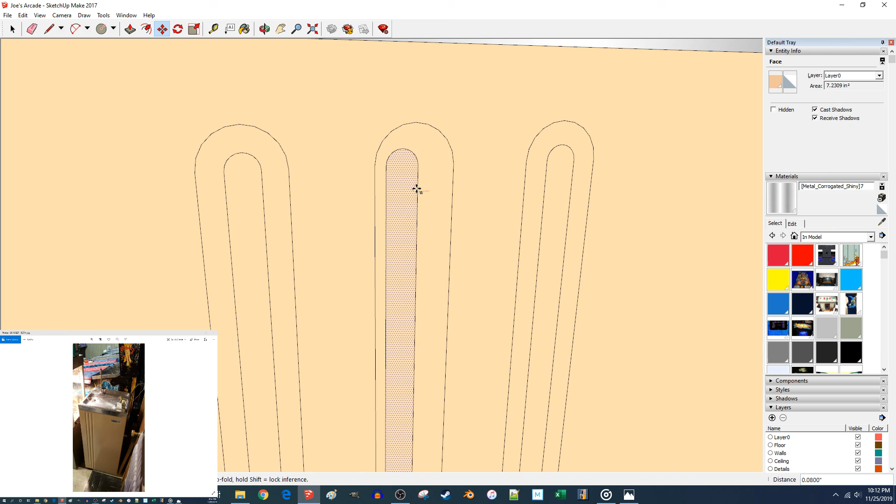Select our new lines. Copy those. Let's go an inch and 2 inches. And we'll move those in just a hair. 0.025 ought to do it.

Hide that. I'm going to actually hide all these edges. Oh!

Let's select the faces and yeah, that looks good.

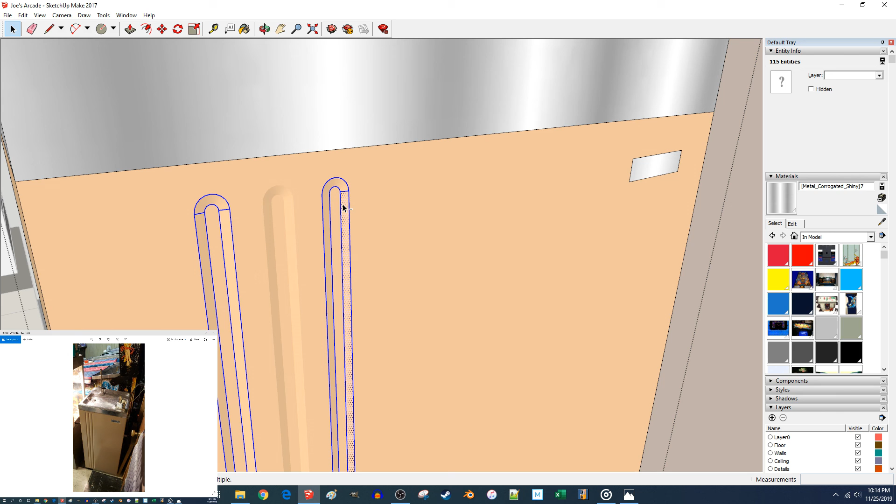You select these faces, hide those last couple edges. And somehow missed these few.

It's interesting how those created different edges that were different even though it was a copy of the same lines. But there we have it.

We've got the drinking fountain modeled. This is still a separate piece, so we'll group that all together. Now we have a single object, and I can move it around.

Now I'm going to get needlessly precise on a couple dimensions because I can. We'll constrain that in and move it 19.5 inches, and we'll set it back in by 1 inch.

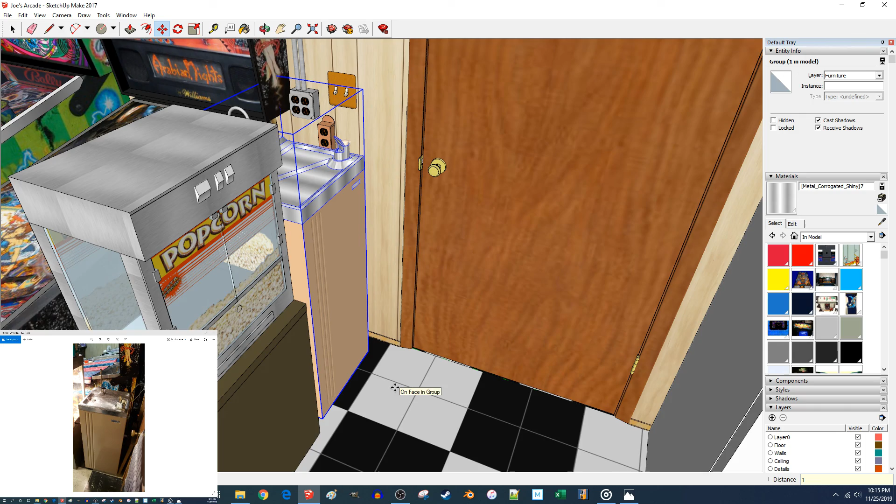And how are we doing comparing to our pictures? That's kind of always the final test, isn't it? I'd say pretty good.

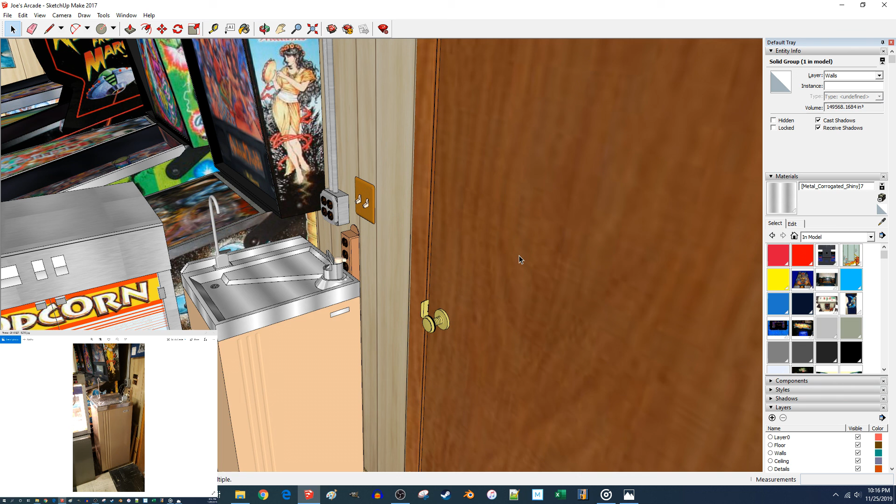Double check my height there. But you can almost line up for the exact same angle as the picture here. I think we got it. It was a little bit of a battle in a couple points, but yeah, got a drinking fountain.